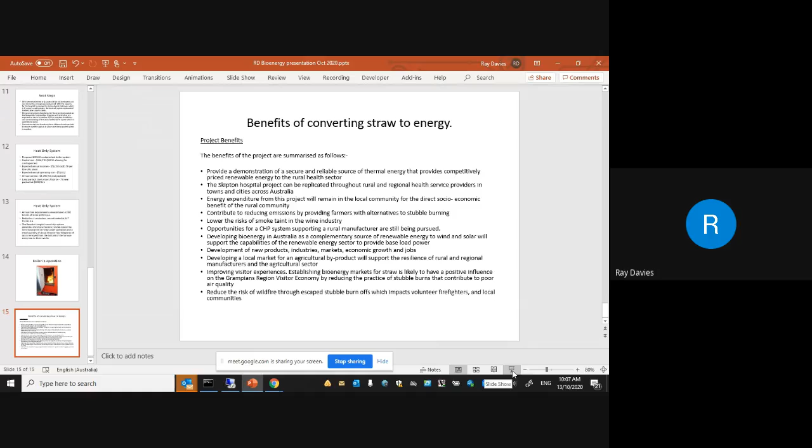We can see benefits of converting straw to energy. Okay, well that's at the very end.

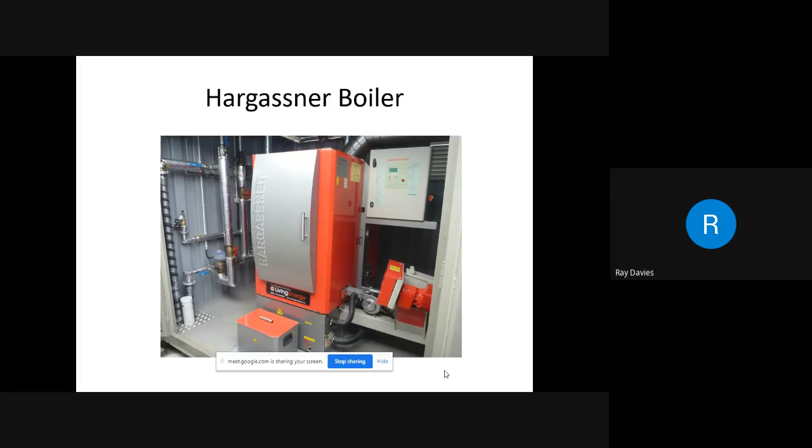This is an image of an existing boiler system installed in partnership between Pyrenees Shire Council and Beaufort and Skipton Health Systems. This system has been working at the Beaufort Hospital since 2014. The fuel source is from a local sawmill about 10 minutes out of town, using wood chips from that operator to provide the thermal energy at the Beaufort Hospital and its hydronic heating system.

But the farming group we're dealing with are very familiar with systems in Europe where straw is converted to energy in a number of Northern European countries, and they're working with us to try and find solutions in a local context. During the course of our work with the group, we became aware that Krone in Germany were manufacturing the Krone Premos 5000.

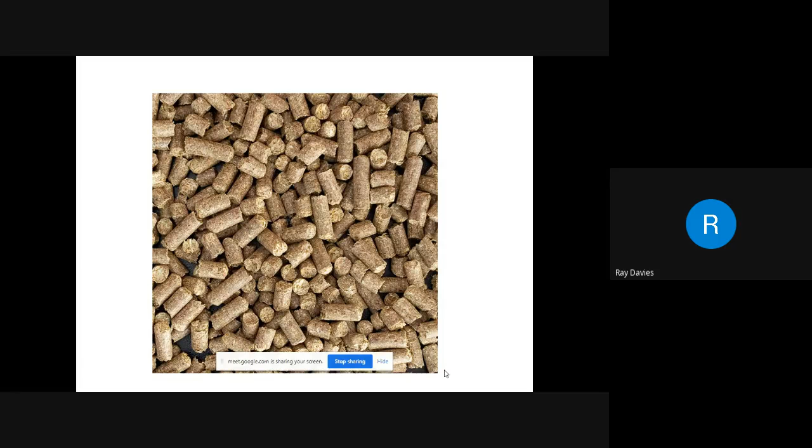The 9 farmers we're working with crop 14,000 hectares, producing about 50,000 tonnes of straw annually. So there's a large amount of potential for these systems in other locations if we're successful enough in developing the markets for them, and that's what our pilot project at the Skipton Hospital is aiming to do.

Throughout the area around Ballarat, known as the Central Highlands, it produces about 560,000 tonnes of crop stubble annually, and a little further west, around the Wimmera Southern Mallee area around Horsham, a further 472,000 tonnes annually. So all in all, west of Ballarat, you can see that around about 1 million tonnes of straw is currently available. Recent figures from Agriculture Victoria indicate that in the high rainfall zone, around about 30% of these stubbles are currently being burned.

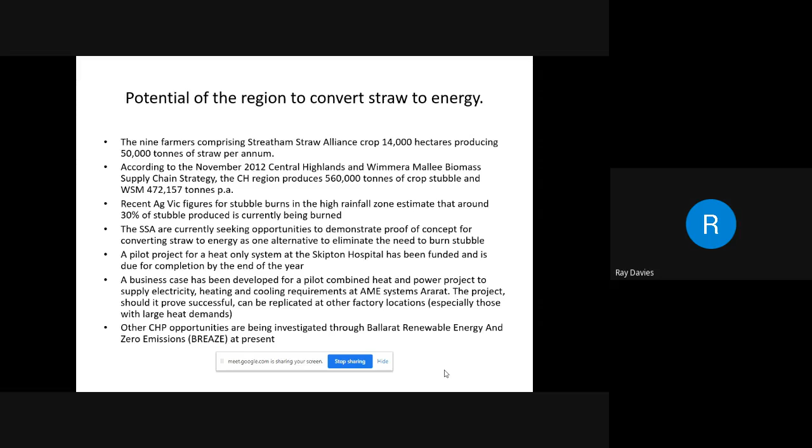The Straw Alliance that we're working with are looking at opportunities for proof of concept that straw is a resource that can be converted into energy and ultimately eliminate the need for farmers to burn stubbles. So the pilot project evolved for a heat-only system at the Skipton Hospital. The project's been funded and is due for completion by the end of the year. During the early part of the project, we developed a business case for Skipton Hospital, which also looked at combined heat and power options. We're currently looking in conjunction with Ballarat Renewable Energy and Zero Emissions for manufacturing opportunities, and we've also been engaged in conversations with a manufacturer in Ararat to demonstrate proof of concept for straw as a baseload source of energy in a manufacturing context in rural locations.

Coming back to Skipton Hospital, there's an annual spend at the time of the business case of about $55,000 on LPG, and electricity costs $46,000 annually. The business case looked at two combined heat and power options, both steam technology and gasification, and then a heat-only thermal system was investigated as well for the hydronic heating and hot water demands at that facility. Straw pellets were chosen ultimately as the fuel source because straw bales were too bulky and provided storage challenges at that facility.

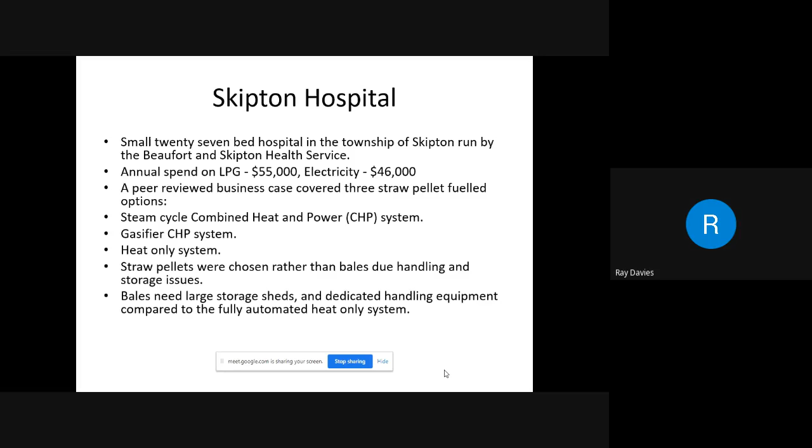So the health services that we're working with chose heat only because it presented a lower risk, lower investment option and the least amount of technological challenges.

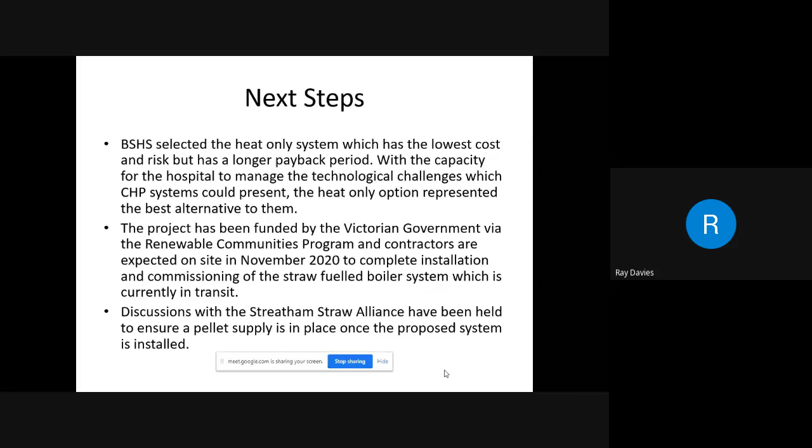The project has been funded with the support of the Victorian Government through its Renewable Communities program, and contractors are expected on site in the next few weeks to complete installation and commissioning, with the boiler system currently being conveyed from Europe to Australia. Discussions with the Straw Alliance have been held between the hospital and the farmers to ensure that pellet supply is readily available, and that'll be documented through a contract.

The heat-only system is around about a 200 kilowatt capacity boiler system. The business case identified that it would be around about a $265,000 investment, and we allowed for some contingencies which have taken our budget to about $315,000. In our negotiations with the contractors, we feel that we will fit just within that cap for our budget.

So the expected annual incomes are the savings in what would otherwise have been invested in LPG supplies of about $56,000 annually. We expect the annual operating costs to be slightly under $5,000 less than that, which at LPG prices of 58 cents when the business case was done gave a fairly long payback period. But depending on where LPG prices end up in the longer term, if we were to consider a 90 cent a litre cost of LPG, then the payback period would be significantly reduced to just under 8 years.

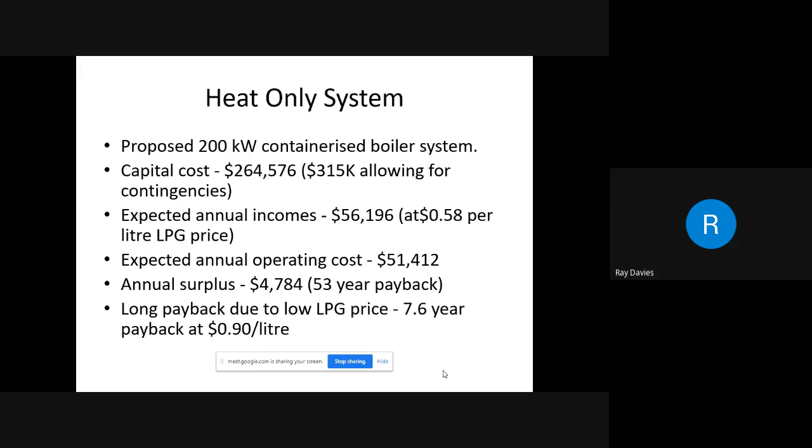So annual fuel requirements are slightly under 400 tonnes per annum. We're estimating emissions reductions of about 147 tonnes annually.

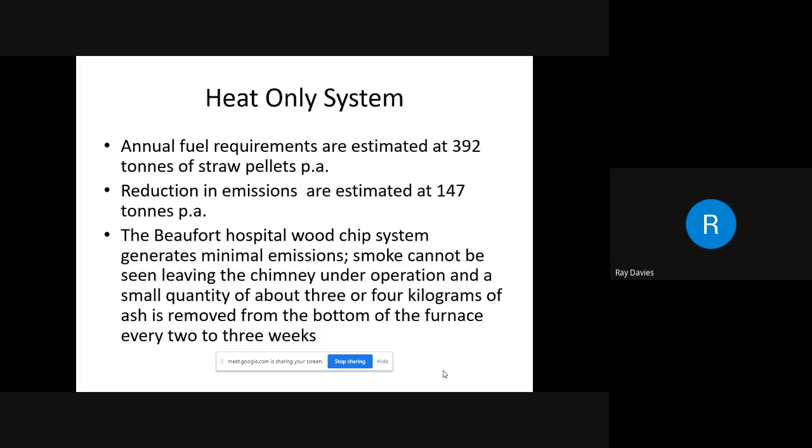The Beaufort wood system, for anybody who's seen that, you just cannot see any smoke coming out of the chimney with that system, and if you do, there's something wrong, and there needs to be a maintenance intervention. That system is fully automated by a computer system which is monitored by the Beaufort and Skipton Health Services operations team on a daily basis. In Beaufort's case, they generally empty the ash out every 2 to 3 weeks, and it's only about 3 or 4 kilograms of wood chip ash. With straw fuel, we expect that percentage to be slightly higher, but nothing significantly more onerous.

This is just a time reminder—2 slides to go. This is simply one of the boilers in operation at Beaufort.

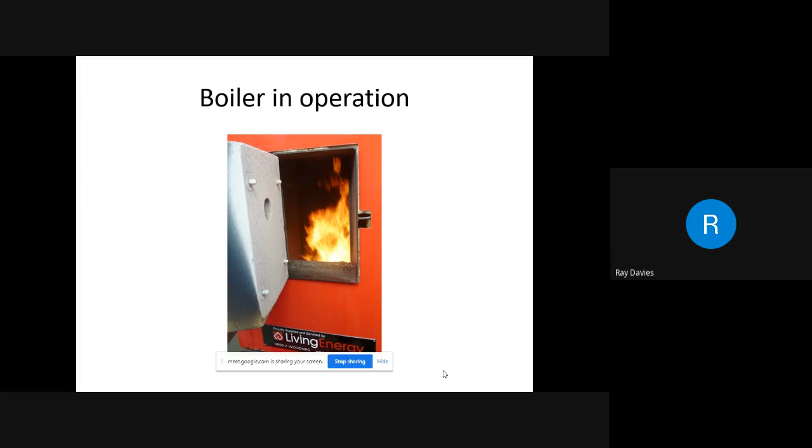The benefits of converting straw to energy are on the final slide, and I'm happy for this slide presentation to be shared with the people who are registered today. Rather than running through all that and chewing up time, I'm happy for that to be shared with the group after the event today.

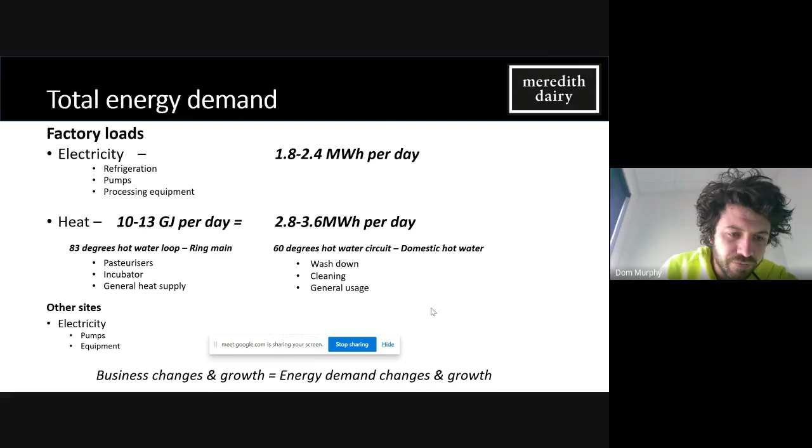That heat goes to two circuits. One is an 83-degree loop that we call the ring main, which runs pasteurizers, our incubator, and the general heat supply for processes. The other is a lower temperature circuit, which is for wash down, cleaning, general usage. At our other sites, so dairies, we have pretty standard loads of pumps, equipment, hot water, refrigeration.

So to start with heat, about 5 years ago they installed a wood-fired boiler. It's a 240 kilowatt boiler. It runs continuously, and through the bulk of the day it will output about 150 kilowatts. It heats a tank, which then feeds the ring main circuit.

We feed it with wood chips. It likes chips at about 20 to 25% moisture content or less. We currently use recycled chips, 25 mil screened recycled chips, which have a moisture content of about 13% - really good feedstock and very cheap. We use about 1 to 1.3 tonnes per day of wood chips.

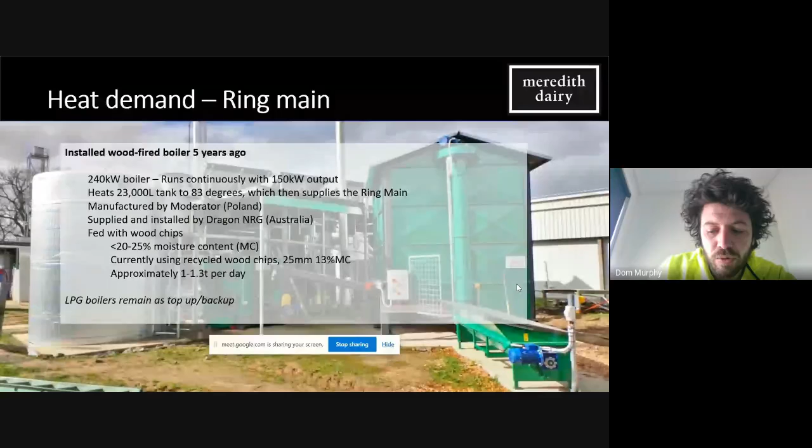And we have LPG boilers which top up through the day, and also as a backup in the event of failure or just machine maintenance. That's the ring main. Our domestic hot water, so this is our lower temperature circuit.

We have solar evacuated tubes over the factory. We use about 15 to 25,000 litres a day at 60 degrees. The idea is those solar evacuated tubes will preheat the water, and then that's stored and then topped up with heat from the ring main through a plate heat exchanger, which brings it up to that temperature.

An issue we have is that a lot of the time, because we're a dairy and we operate in the early hours of the morning, our usage will outstrip our storage. So we'll have depleted our storage capacity before the sun comes up. We're currently looking at increasing that storage so that we can extract heat from the sun the day before and store that for when we use it the following day.

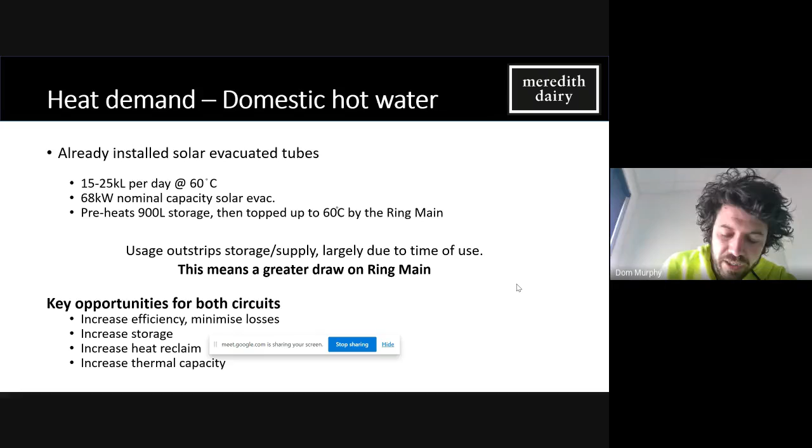So our greatest opportunity on either circuit - increasing efficiency obviously, but storage is another really good option, and increasing thermal capacity through heat reclaim or additional bioenergy options, which I'll talk about in a moment.

So this is last Tuesday, a week ago. We've recently secured new suppliers or pricing for both of our fuels, and they're both extremely competitive. Our wood chips are very cheap, and our gas is extremely cheap as well, which doesn't help with the equation. But even considering those points and the lower efficiency of the wood-fired boiler...

We're paying about $7.60 to get 1 gigajoule of energy into our water, which compares to $23 for 1 gigajoule from LPG. Our current demand - 70% of it is met by the wood-fired boiler, and that 70% costs us about $25,000 a year. By comparison, the remaining 30% coming from LPG is costing us about $32,000 a year, or nearly $33,000 a year.

If we are able to completely move away from LPG through things like storing extra hot water, then our wood chips would cost us $36,000 a year to run the factory, including being a very low emissions source of energy. If we had no boiler and were entirely dependent on LPG, that same energy demand would cost us almost $110,000 a year.

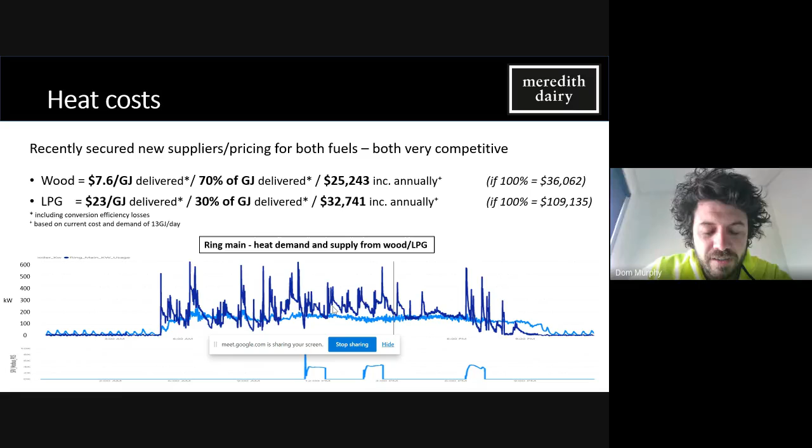Every time we turn a pasteurizer on or turn a process on, there's a significant demand on the ring main circuit. And at points in the day, you'll see this lower line here - sorry, the figures aren't great - but that's when the LPG boilers will come in. So we sense that the tank is too heavily depleted, so we need to bring the LPG boilers on.

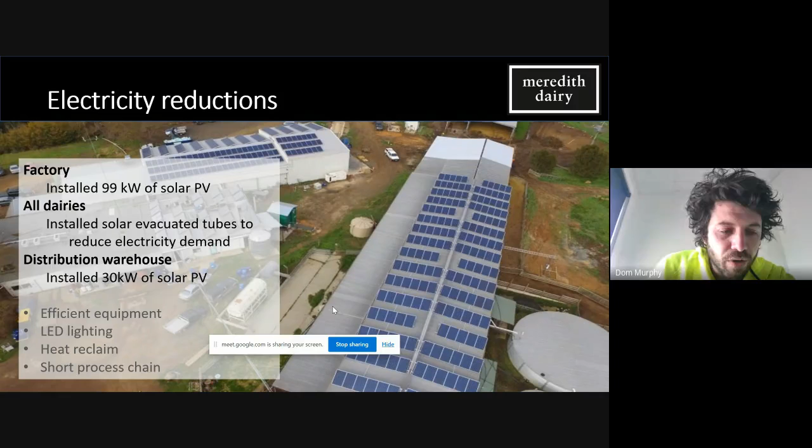So electricity, I'll just quickly talk about that. We've installed a lot of solar PV, solar evacuated tubes across our sites - all the things that everybody does to reduce their demand. We've still got a bit to go, but we're getting there.

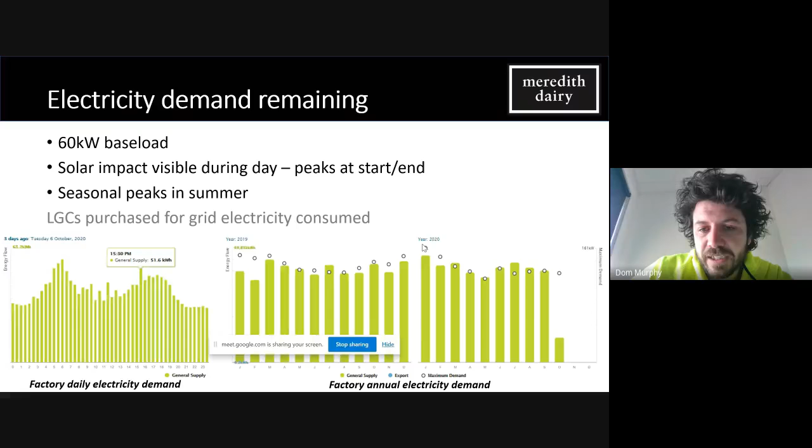Throughout the year, you'll see we have a bit of a seasonal fluctuation, partly attributable to production, but also attributable to temperature. Another thing to mention is that we purchase LGCs for all of our grid consumed electricity, which adds extra costs, so it makes any sort of business case looking at bioenergy even better from that perspective.

So I guess that's where we are at the moment - already saving a lot of money from wood chips and solar, but we want to become completely self-sufficient and look to other options.

So one option is obviously thermal storage efficiency. Another one, there's a lot of talk about solar PV and battery storage to address our electricity demand with just those two technologies. Significant cost and resources - it won't address our heat demand, and we'll continue to have seasonal variation where there's low solar irradiance, but we still need electricity.

So another option is to look at anaerobic digestion, given we have a lot of manure, or wood biomass combined heat and power units, given it's not so daunting to us already having the infrastructure to deal with a lot of wood chips. But both of those have practical considerations around how they integrate into our business.

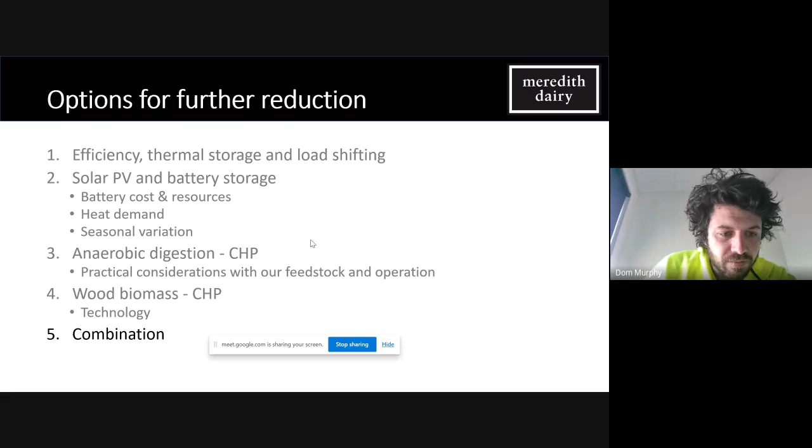So I think a combination - and I'll talk about that - one option we're looking at is really the solution here, not any one technology, but a combination.

So I just want to highlight that the bulk of that energy reduction is coming from a bioenergy source, like it would come if we go down this path, and the solar PV is really just tweaking around the edges.

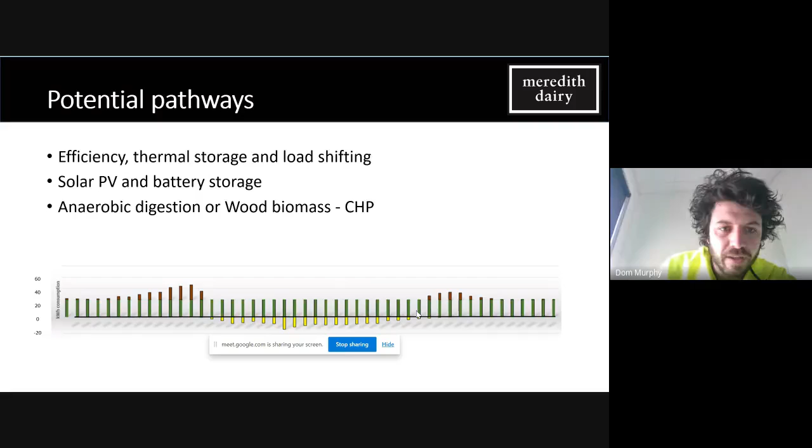At other sites where we're not using that much power, we're not really going to invest in a large scale bioenergy technology, but we can look at smaller things. So we have waste oil from the factory, vegetable oil, like the oil that comes in the cheese. We're seriously looking at some oil heaters for our hot water at the dairies, heat reclaim for the refrigeration of that milk, staged heating, so solar vac tubes to gradually heat up water and reduce the electricity demand.

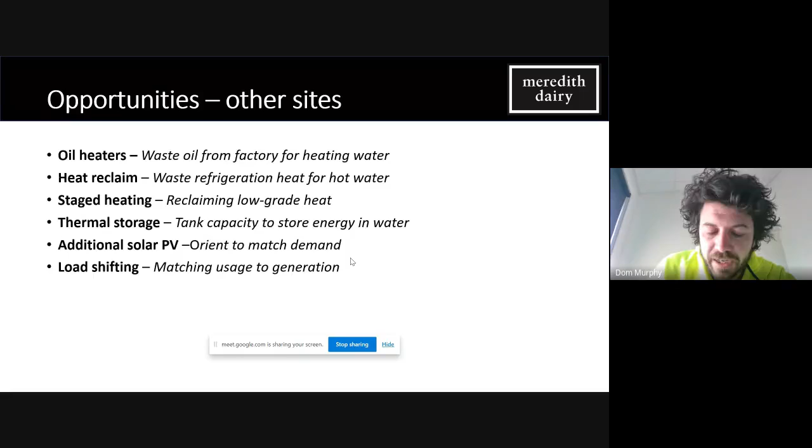Additional solar PV and load shifting. So it really is a combination of understanding our load and trying to do little tweaks to match that energy demand in the lowest impact way possible.

And then quickly, just some of the other stuff that we're doing. We've started recycling a lot. We have across the entire business 26 waste streams, and we've reduced our waste to landfill by about 70-80% from the factory.

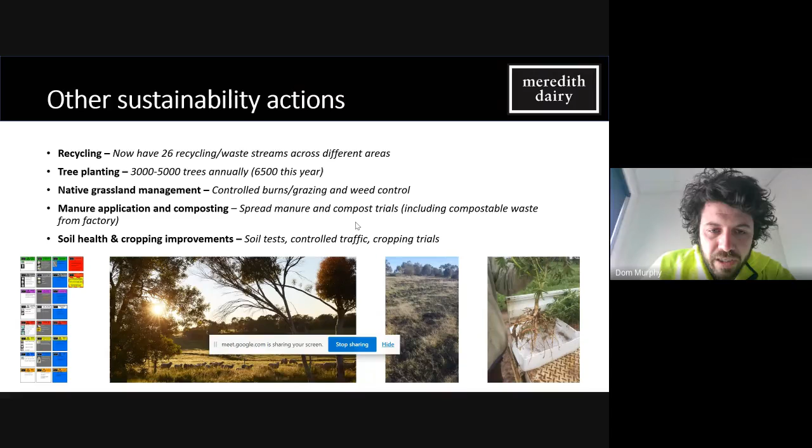We have a tree planting program which Tim's taken care of, and they've planted almost 6,500 trees this year. Native grassland management, and also looking at composting, manure, which ties in with the anaerobic digestion option, and also looking at different things around soil tests and soil health, and some other things.

So thank you very much.

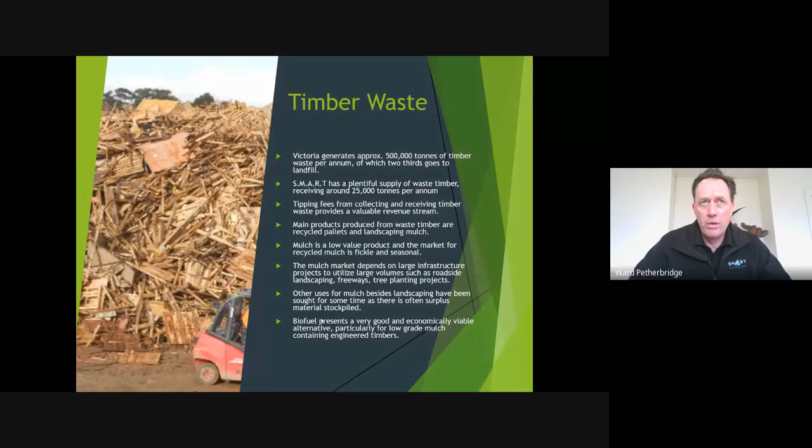We looked at animal bedding, and we keep coming back to bioenergy. Bioenergy is simple and straightforward, and we've looked at various alternatives from producing heat to producing power, and we've come back to producing heat for producing hot water for the heat treatment of timber pallets.

Pallet recycling is the core of the Dandenong site. That employs about three quarters of the people on that site, repairing and making pallets. We build and recycle around 500,000 pallets per annum.

If you had asked me 20 years ago when I got into recycling that I was going to become a pallet company, I would have been scratching my head, but that's what's happened. That's how the waste stream has evolved.

Again, focusing on reuse, as most of what was coming in was pallets and packaging, focusing on trying to find customers that will use those pallets again and again and again, hopefully - that's where we've landed.

A typical pallet sells for between $10 and $15, which is a hell of a lot more than a handful of mulch. And export pallets is a growth area. It's got less competition.

You've got to have a heat treatment kiln to do it, or you can use methyl bromide - a toxic gas. Most people use heat treatment, and they're using either natural gas or LPG to heat their kilns.

Now, we've got a plentiful supply of timber waste, and we also receive a tipping fee for that timber waste, so we've got a valuable revenue stream for that material. The economics of our project are very much linked in with getting that tipping fee. It wouldn't be viable for us to do this project without that.

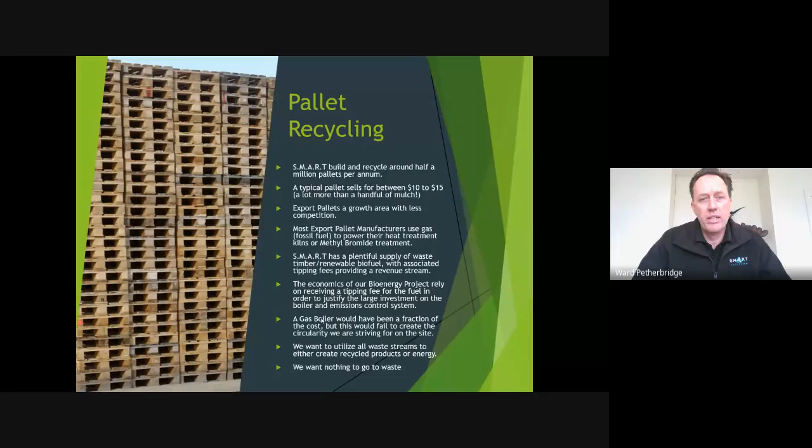I also have the ethos that we want to use everything that comes into the site, so anything that comes in needs to be recycled. Even the ash from this boiler, we're hoping to get EPA approval to blend that with our crushed aggregate. Any nails in the ash will be taken out with a magnet, so nothing will go to waste.

In January 2020, we were awarded a Sustainability Victoria grant for $437,500. We're building a 2 megawatt hot water boiler. That's under construction in Italy - they're about halfway through that at the moment.

We've got 2 pallet heat treatment kilns under construction in Melbourne. We're going to heat water to 85 degrees to supply hydronic radiators for the kilns, and each kiln's capable of heat treating 600 pallets per cycle.

For an export pallet to be certified, it's got to be heat treated to ISPM 15 standard, which is the international standard for phytosanitary measures. And that requires 56-degree core temperature for 30 minutes.

That means at the thickest part of the timber, you have to actually drill into it, put a temperature probe in, and you've got those probes all through the kiln, so that the inner timber of that pallet needs to get 56 degrees for it to meet the requirement.

And then you can stamp it with an IPPC stamp and it's ready for export. Obviously that prevents the spread of disease, kills any insects that could negatively affect plants or ecosystems overseas.

Fuel for the boiler will be waste timber consisting of wood chip, made from pallets, crates, boxes. We're looking at using about 2,500 tonnes per annum, which is a fraction of the 25,000 tonnes we get in each year. And there's a bag house and cyclonic filter to clean up the flue gas to EU standards.

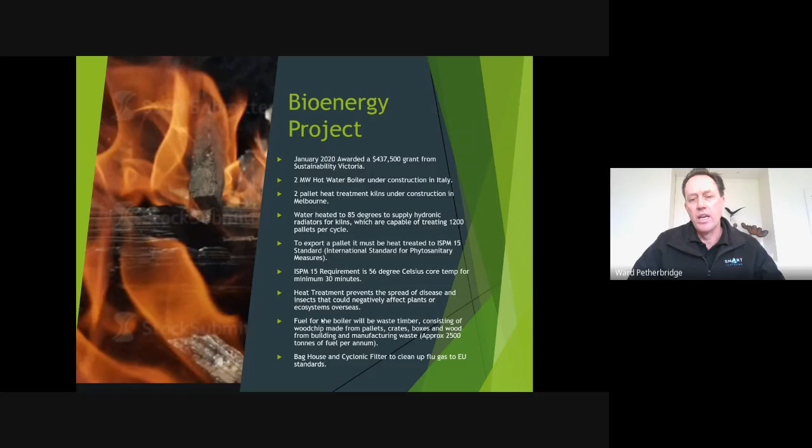We didn't necessarily have to put that in, but we wanted to basically put our best foot forward and do world best practice. So the boiler we're using is a Uniconfort Boiler from Italy.

In the background there, you've got some images of the typical sort of packaged material that we're utilising. You can see there's a fair bit of plywood - it'll be plywood, chipboard, MDF, oriented strand board, pine, hardwood. It's a real mix, probably about 50% engineered, 50% non-engineered.

That'll be shredded through one of our mulching machines to be around 10 to 20 centimetres in size.

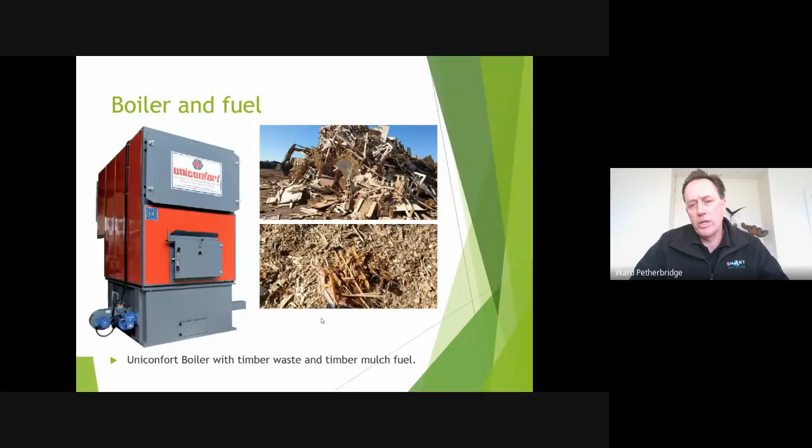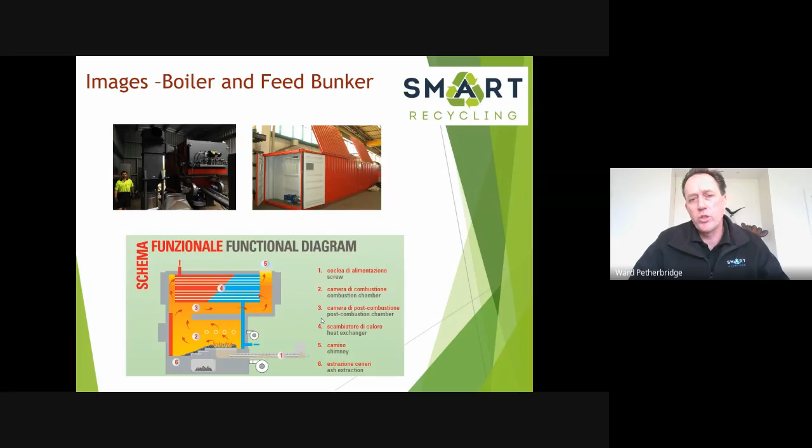We've got a 40-foot shipping container feeding bunker, which augers the fuel into the boiler. Some more images of the Uniconfort Boiler there.

Each batch will take about 4 to 5 hours to reach the core temperature, and that'll depend on the time of the year. As the fuel's cost neutral for us, longer residence times will be economical.

So I'm looking at actually doing contract heat treatment for other pallet, crate, box manufacturers. There's not many in the industry that will do that for their competitors - I'll be doing it for anybody who wants to knock on the door.

And we can offer those longer residence times that people burning gas or LPG, it's just not economical for them to do. So we can take larger items, they can sit in that kiln for a day, 2 days. That's not a problem for us.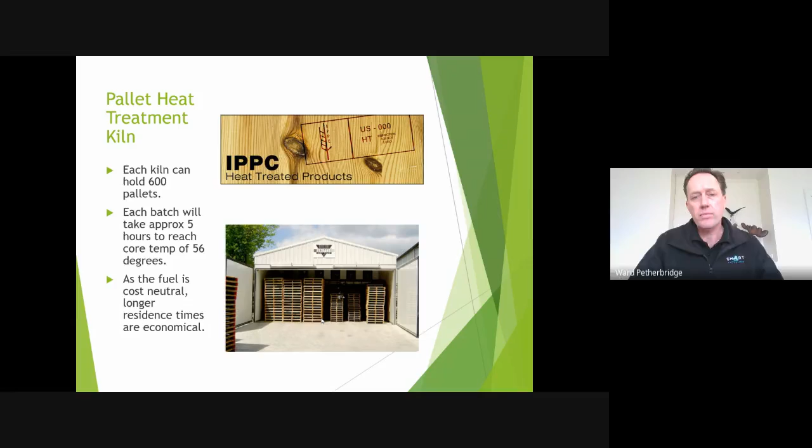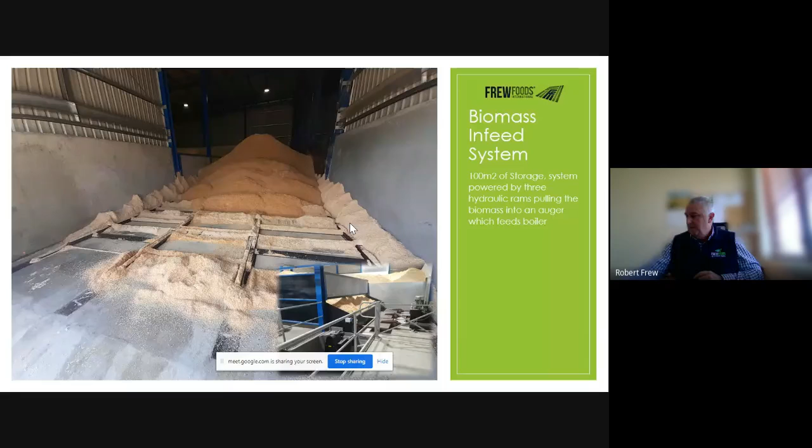So these slides, that's the inward thing. That's our trucks bringing back the material that unload onto the moving floor. The system's fully automated, so we don't need anybody in there to manage it. It's just a matter of keeping an eye on the system as we go along, and we've got people within the facility just stick their nose in to make sure everything's running correctly.

The system was installed in February this year, so once we've run 12 months, we'll have a bit more of an understanding of any wear and tear on the equipment, but I don't think there's too many things going wrong.

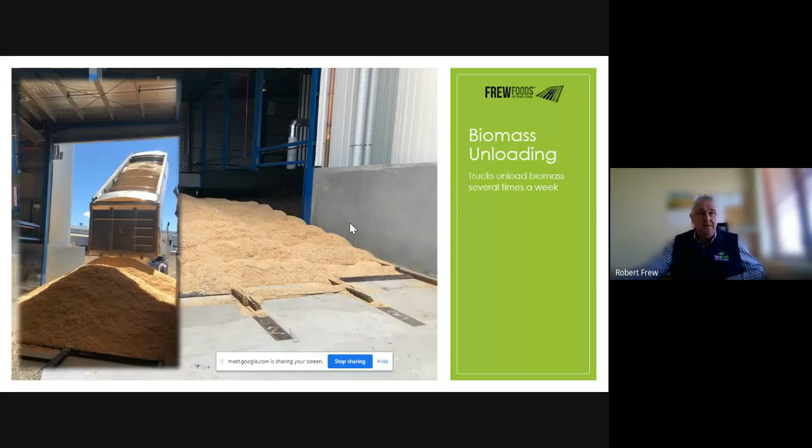This is the actual unit and the actual room that it's in. The room we put it in is 30 metres by 15 metres, so it's 450 square metres. We've had to put an extension on the front to keep the raw material dry, because we were having issues with over-moisture product, which was a problem for us. It wasn't burning correctly, and we had to continue changing the speed of the system, which we've fixed now. Everything's enclosed within the shed.

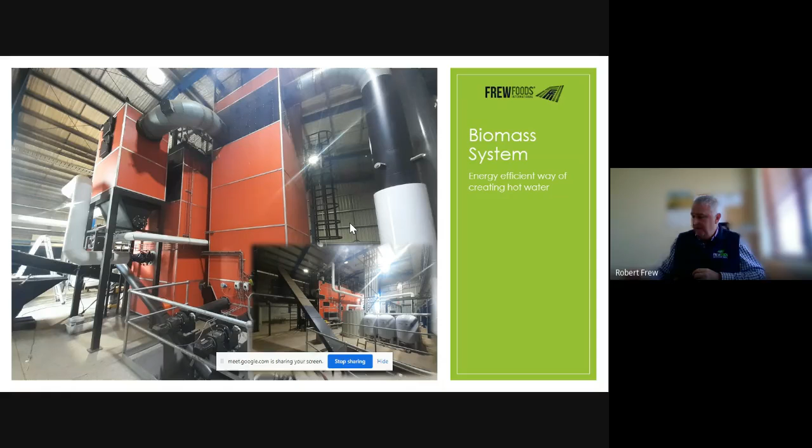That's the control panel, so basically it can be controlled from anywhere in the world, just linking into it, but we pretty much have control of it ourselves now. It runs fairly efficiently, so there's not too many things we have to modify on a daily basis. We're only burning the one material, so it's fairly straightforward, all set up to do that. If we were burning different materials, we'd probably have a lot more issues. So it's a lot easier just burning the one sustainable sawdust product we get out of South Australia, which is very efficient and cost-effective.

So that's the front of the shed. We've got the large water tank there, and that's the unloading area where the B-double can basically have each trailer tipped up to its full height, so all the product falls out of it, and we don't have to worry too much about unloading the trucks. It's fairly straightforward, and then we have the buffer next door.

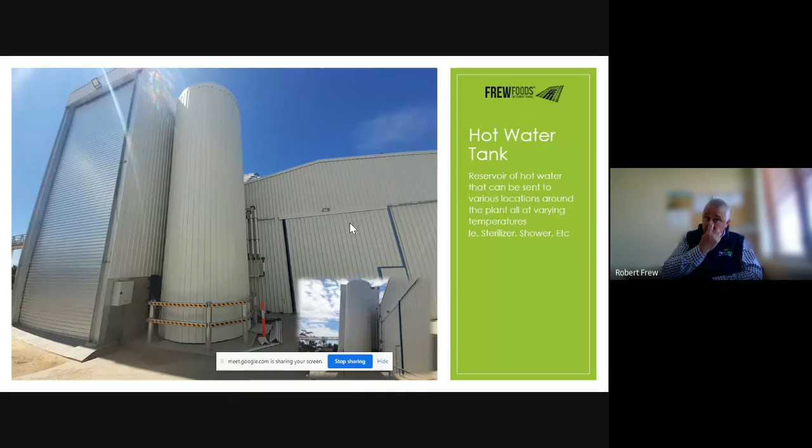We can hold up to 200 tonne of product in the shed if we need to, about 60 tonne on that movable floor and about 140 tonne next door to that, through the Christmas periods, where we get the raw material for them if they have a breakdown or a shutdown for any period of time. The burning rate of the product is very good, so we basically don't get a lot of ash at the end of it. It's 0.5%, so we only get about 15 tonne of soot a year.

This picture shows the different heat exchange systems we've got. We run different temperatures to different parts of the factory. We have cooking processes which require 92 degree water. We also have wash down water for the showers, the hand basins, the sterilizers. So we've got about 4 or 5 different temperatures that we run, and all of that is finished through the heat exchangers to get it to the temperature we need. It's very efficient and it's instant.

So it's a ring line system, the water keeps coming back to the tank, so we basically always have the right temperature through the plant, which used to be a real issue for us before when we were running boilers and trying to adjust the temperature. This system's a lot more efficient and a hell of a lot cheaper to run.

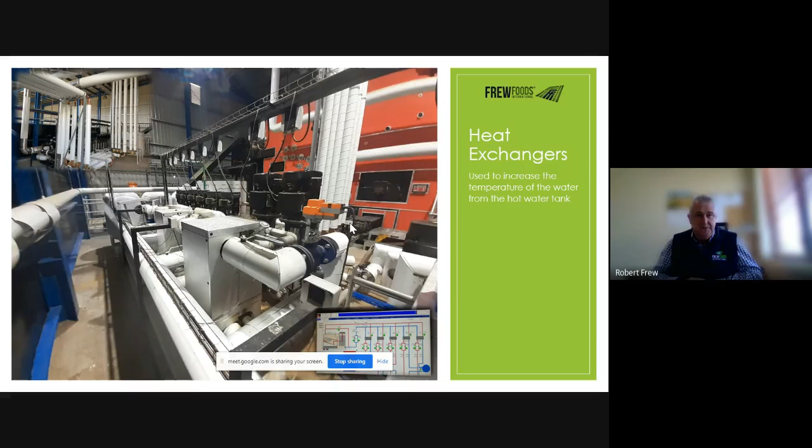So for us it was a bit more costly to do it this way, probably cost us an extra $200,000, but it's well worth the effort of moving it away from the plant. In the future we're looking to put in a rendering plant on site as well, which will be fairly close to this biomass system we've put in. So for us, it's all about thinking to the future.

The payback on this system is probably 3 or 4 years, but as we get busier the payback will be quicker. When we first looked at putting the system in, our gas bills had gone to $60,000 a month. They're back to about 40.

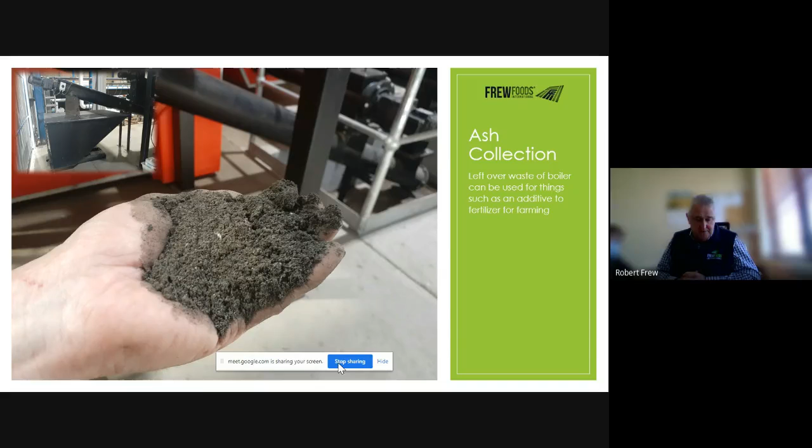Very good, thank you for that. Great presentation, Robert, fantastic exercise.

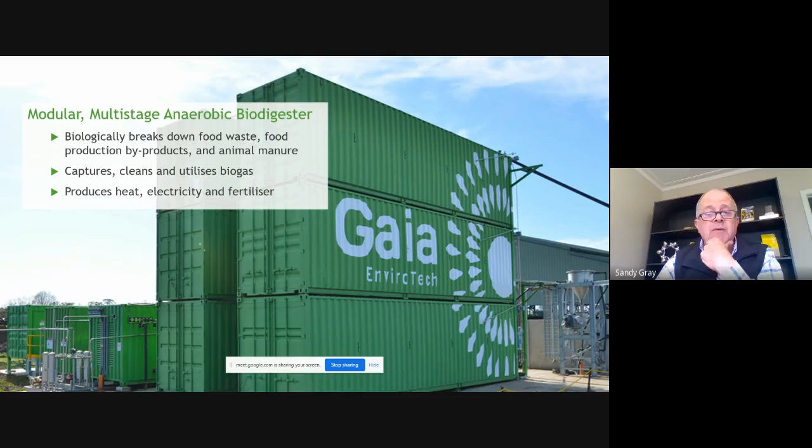So we've got a multi-stage anaerobic digester. I'm going to flick through these first few slides reasonably quickly to give you a feel for the technology. Basically, we're breaking down food waste, byproducts and animal manure, whatever we could get our hands on. We're converting that into either heat or electricity, and more importantly, looking at the whole system and how we can maximise the products, but also what else we can do in the system at the same time to handle waste streams in general.

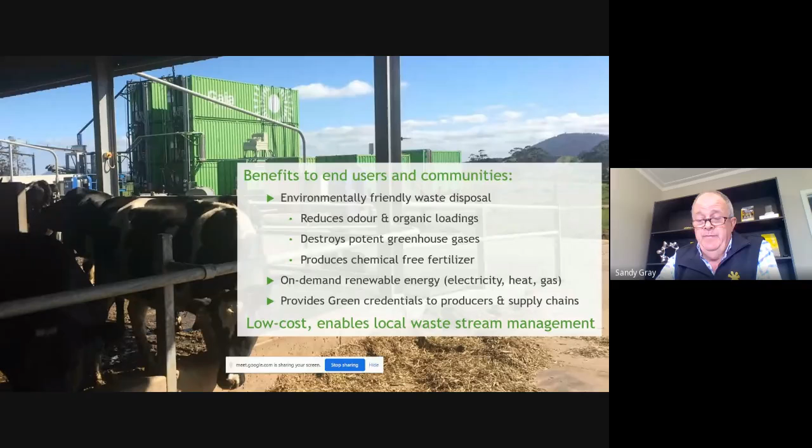So the benefits to the users is that it's an environmentally friendly waste disposal system. It reduces odour and organic loadings. We're destroying potent greenhouse gases. We're looking to produce chemical-free fertilisers from the discharge. And of course, very importantly, we do on-demand renewable energy. We can store our energy for use in peak periods. As you saw with Dominic's chart, those peaks are still an issue for a lot of renewable energy outcomes. So also green credentials for producers and supply chains.

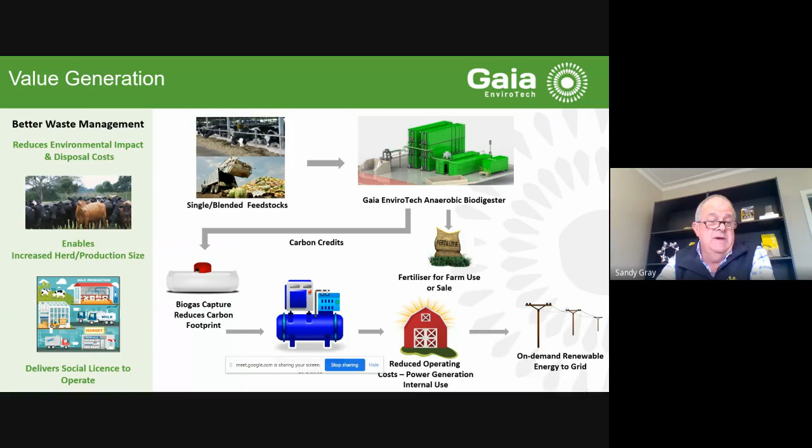I guess the modular design, the really important part of this, is that the system is easily expandable. We can start with a smaller system and expand it. We don't have to build in the final expanded finished unit or capability for expansion later on. We can build a smaller unit and keep increasing it. We just keep adding cells. You can see the multiple cells we're using in this system.

Importantly, the actual process of biodigestion requires different pH levels and different chemistry at different parts of the process. The first part, hydrolysis, requires a lower pH, and then you have a slowly climbing pH. So having a multi-stage digester makes a lot of sense in the system. It's much more important to try and optimise the efficiency. You can see in some of the previous presentations that efficiency and ability to achieve reasonable paybacks really relies on us getting the efficiency up on these systems.

We don't have, in a lot of cases, the same benefits that other people have, for instance in Europe, where they have very small land holdings. There's much more emphasis on reduction of waste in a much smaller land area. We have much greater land mass, so that makes us a little bit more lazy in this area. That's where we really need to be more efficient than most.

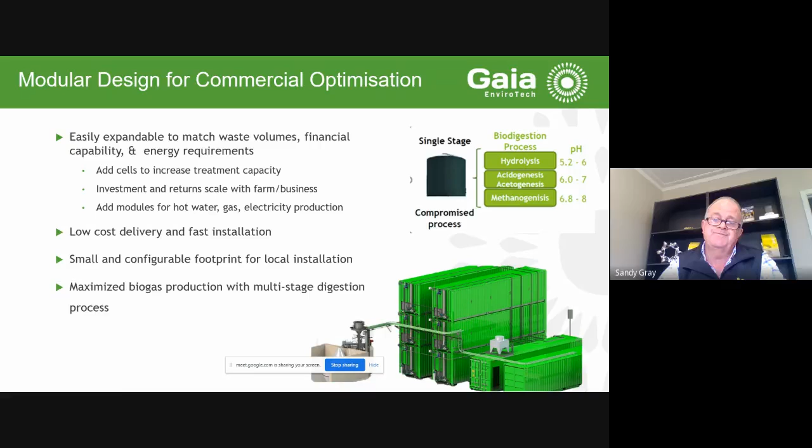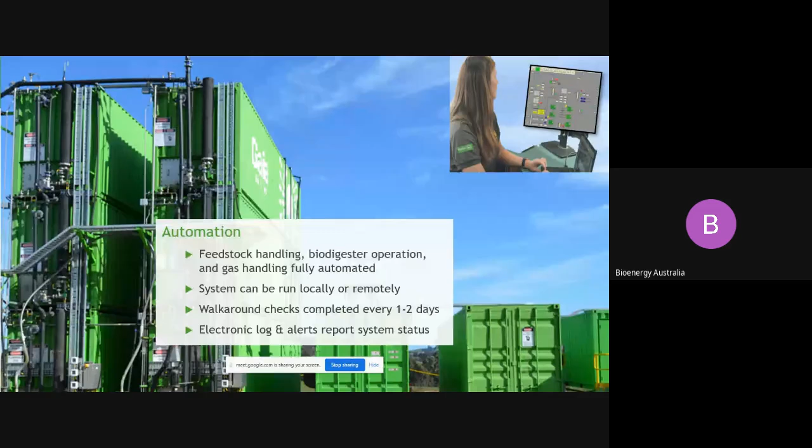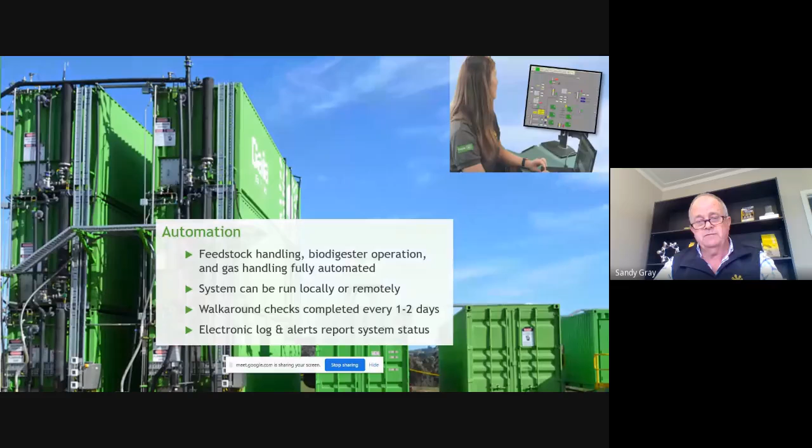So for waste management solutions, what we're really trying to do—and I think in Dominic's presentation it was interesting because they're looking at a whole raft of solutions, not just one solution to solve all their problems—in our case, we're looking at how we can connect this system into other systems to benefit those systems.

So things like, for instance, our fibre coming from the system might be composted to go back for animal bedding. In one case, we're looking at recycling the bedding, which is a gravel product, using our mining experience to recycle their gravel back into their beds, and looking at post-treatment for water, for recycling water and making it more available for respreading back onto pastures and other agricultural outcomes. Managing the whole solution system is important for us.

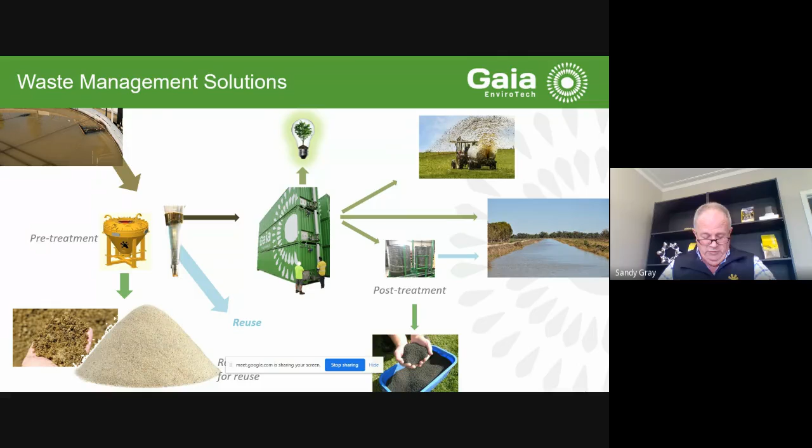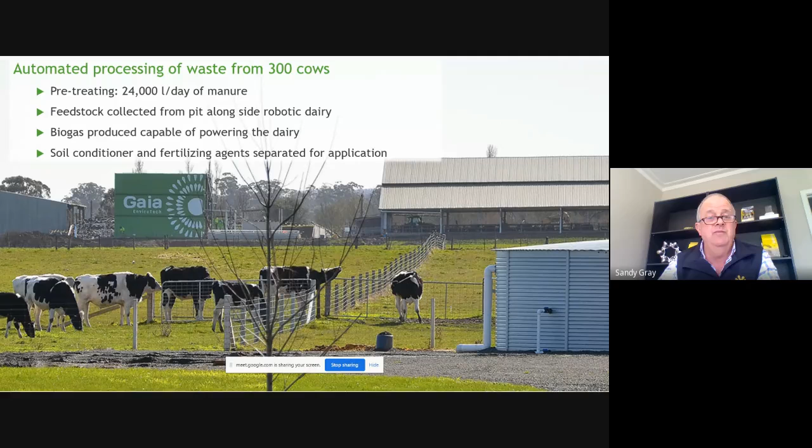So far we've run a pilot on a 300 cow dairy. It's an undercover dairy—we collect 24,000 litres a day of manure. That's our feedstock. We turn it into biogas, and the biogas goes to power and whatever else. Soil conditioning comes from the fibre produced out of that material, and one potential is to turn that fibre into bedding and put it back into the barns again.

We're working with the government, with FIAL, Food Innovation Australia, at the moment. We've got a program running with some of our sponsors, like TasGas, a major sponsor of this program, Meredith Dairy, Trigg Farm, Trigg Dairy, Booth Transport, and ourselves.

We've just installed a pilot, and I'll talk about that in a moment. What we're really looking at is the mixtures of feedstocks, and how we utilise those most efficiently. For instance, you might want to join a low-grade feedstock and a high-grade feedstock together to give you the best efficiency and optimise the outcome of the system.

One of the things we've been working on is building our own biodigester, or biodigestion lab. We feel this is the most important. The first question we get asked by all of our clients and potential users is: what can we get from our waste, and what's it going to look like? How much is it going to cost? And what's the final program at the end of the day?

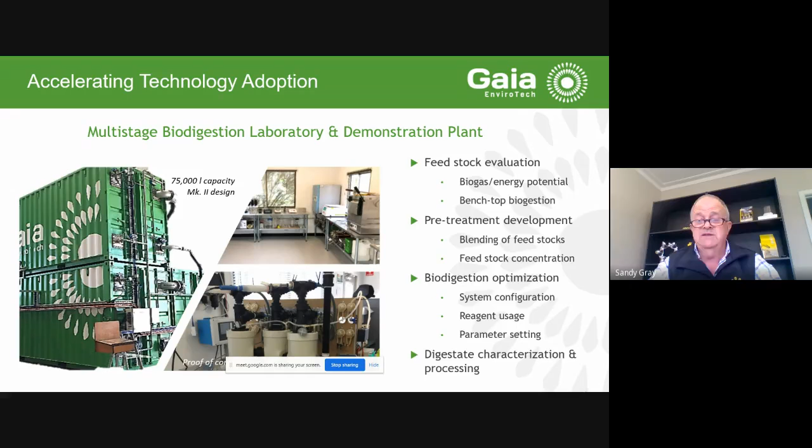We really can't answer those specific questions very well without doing work on the actual feedstocks, and we didn't find anywhere in Australia where we could get answers to those questions down to the detail we needed. So we're able to look at the feedstocks, carry out digestion on them, and understand what sort of outcomes we can get—making that scalable into full-scale commercial units. This is just a picture of some of the work.

You would think that cheese whey and permeate might not be very different, but feeding into the same system, you can see the permeate responded extremely quickly, but then it looked like we had an overfeeding event, which meant we had to slow it down. Then, of course, we came back to about the same point as the cheese whey. It just shows that, intuitively, we would have thought cheese whey and permeate might be relatively similar, but obviously they needed to be treated differently.

In the right-hand bottom corner, you can see some of the work we're doing on clarifying some of the water, or the low density feeds we're getting, looking at this as a pre-treatment ahead of the main treatment. We can do that work in our laboratory at the moment. It's very important to be able to upgrade and take out the COD, BOD materials into a more dense product that we can feed to the system, to get the efficiency up and get the capital costs down.

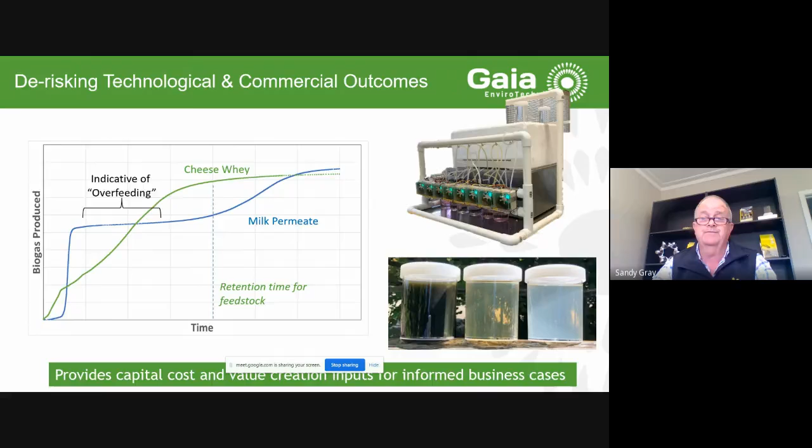So the demonstration plant is at a very large cheese manufacturer in Southern Australia. It's an 8-month deployment, and it's been held up quite a lot by COVID. Food manufacturers got very concerned about COVID, and we've not been able to access the site since the beginning of the COVID situation. We were literally 2 days from turning it on—we'd put the bugs in and had to walk away. We're about to get back on site now and start the pilot, which is very exciting.

We're doing both cheese whey and milk permeate on the same site, and this will give us fantastic data for what is a very large industry dealing with those products at the moment. A lot of what's driving that is the disposal of those products getting more and more difficult for people. So assessing the biogas production and downstream water disposal issues are all driving these things. That's a pretty exciting project.

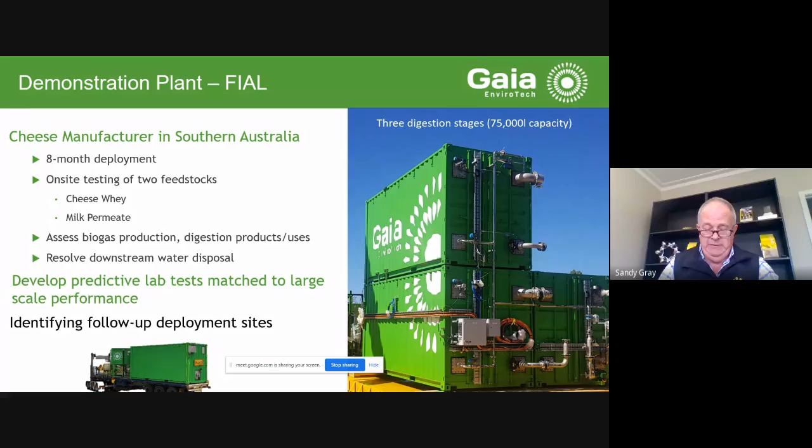I guess the next one is we're about to start site construction this week in Northern Victoria for a company who are bringing in high-value waste from all over Victoria, and into New South Wales. We will be building our new digester. We've just shipped it out of the site here at Gecko, and it'll be constructed and commissioned over the next month or so. Very exciting project, and already talking about expansion because the availability of waste from around these parts of the world is growing, and people are really looking at doing things with their waste to add value.

Then I guess we've got advanced negotiations and an MOU with another food manufacturing company working in Western Victoria. At the moment, we're doing continuing trials with those guys, looking at how we can best supply energy to them, and that would probably be combined heat and power. The great thing about this one is that we can provide relatively low-grade heat, which is usable in their process, right through to high temperature heat and potentially power through the fence. We'll be looking at potentially doing this one as a model where we provide the equipment, and basically they'd provide us the feedstock. We'd provide the energy back through the fence to those guys.

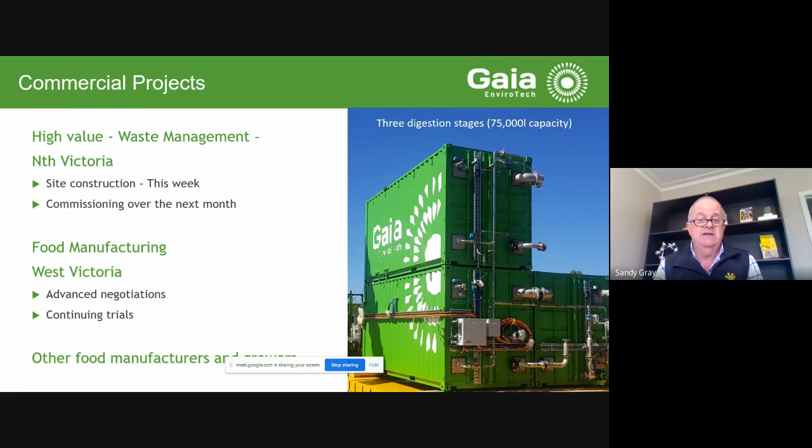So we've got a bunch of other food manufacturers and growers that we're talking to at the moment. We've got a lot of work that we've been doing in quoting. Our lab is flat out at the moment, reviewing different waste streams, and it's a very exciting time. So I think pretty much that sums up where we're up to.

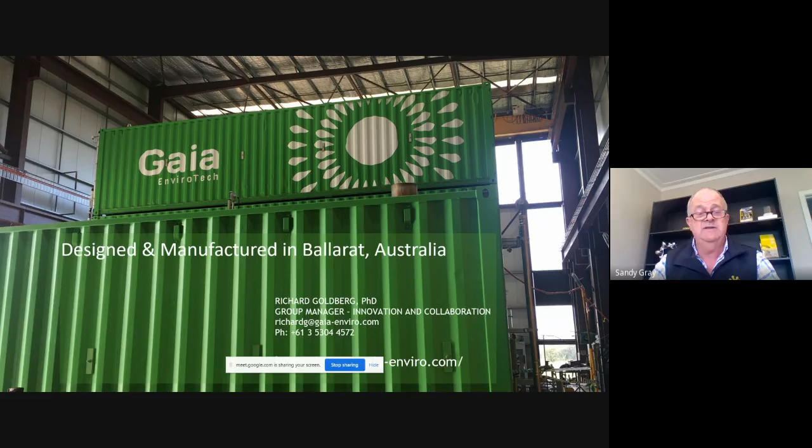And of course, there's a lot going on in this space. It's very exciting to be part of it, and certainly we'd love to be trying to reduce the amount of technology that's coming in from overseas, and be producing it in Australia locally for our local market. That's probably all from me. So thank you very much for your time, and I'm going to hand back to Andrew, I believe.